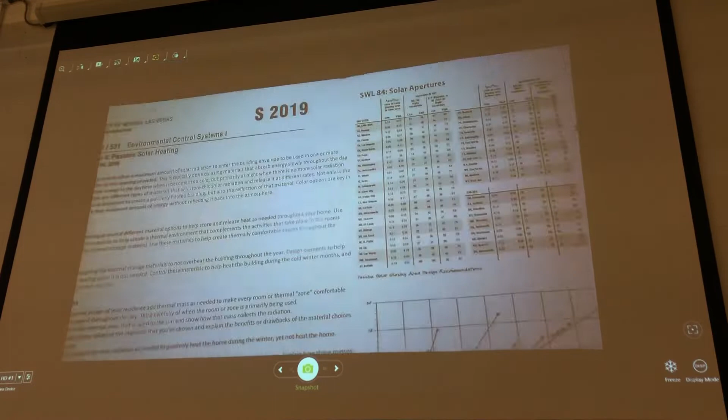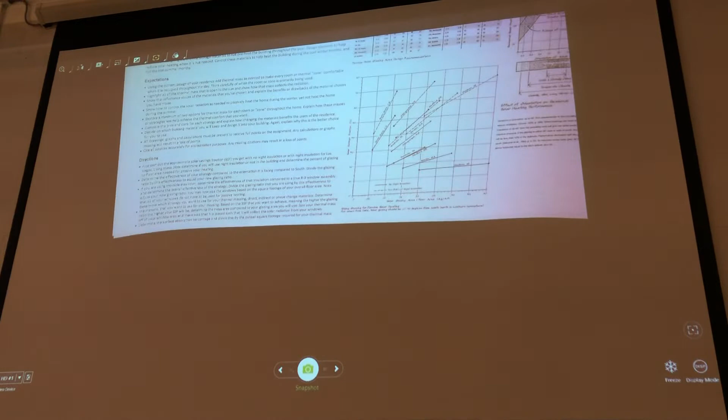So what is it that we're ultimately looking for with exercise 4? Well, essentially we want to make sure that we're able to heat the overall interior of our entire building as much as we can through passive solar heating.

So what we want you to do is use your current design of your residence and look at trying to create thermal zones. Thermal zones can be whatever it is that you want them to be. They could be individual rooms for all I care. Realistically, for things to work very well, ideally you want to try and group rooms together. So maybe you have one large open area for your living, kitchen, dining, whatever it is - you can make that one zone, and then make everything else a separate zone.

At the very least, you need to have a minimum of 2 zones. At a minimum, 2 zones.

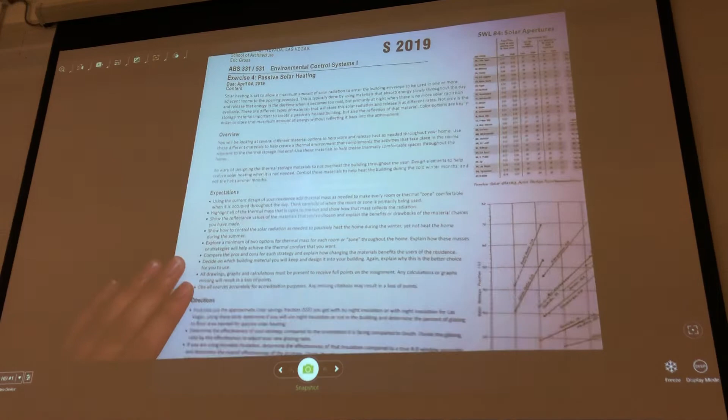And what we want you to do is pay attention to when that room or that zone is actually going to be used. So think carefully about when it's primarily being used and try to design your thermal systems based on when they're being used.

So think about it logically. Your bedrooms are probably going to be used more at night when people are sleeping, so maybe you want something that's going to last longer through the night to keep the space comfortable. Your living, kitchen, and dining area might be used mainly during the day, and maybe there's a specific spot that people are going to congregate towards as soon as the sun rises.

That's up for you guys to decide and for you guys to explain, okay? Questions on that?

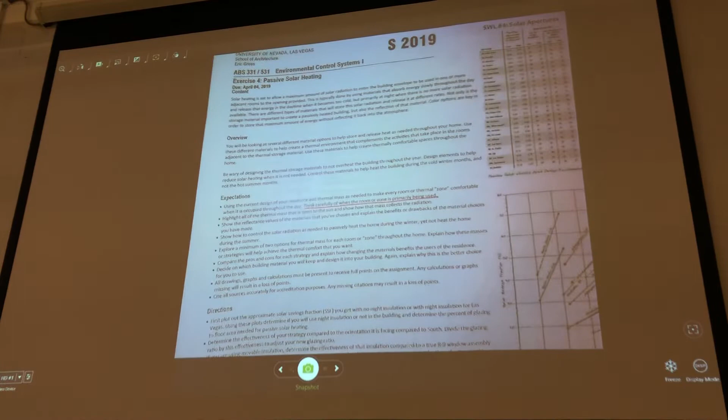All right, from there, we want you to highlight all of the thermal mass that you have that is open to your solar collectors. So wherever you design your thermal mass, make sure there are windows that allow for solar radiation to hit them, and we want you to show us that.

Where are you designing your thermal mass? Whatever system you want to design, just show it to us. And show us where your south-facing glass is going to be located.

Show us how you're going to control it. Just give us some simple diagrams. Are there any controls? Do you have it to where there is night insulation? Show us that. Do you have it to where it's going to be protected during the summer? Show us that, so that way no solar radiation actually hits it.

Yes? It could be just diagrams, absolutely. We just want to understand how it is that you're actually controlling it, okay?

We want you to explore at least 2 options per thermal zone. It can be the same 2 options for each zone, but try 2 options per thermal zone. So try a trombe wall and just a direct gain system. Try a direct gain system and a roof pond. Just try 2 different things, okay?

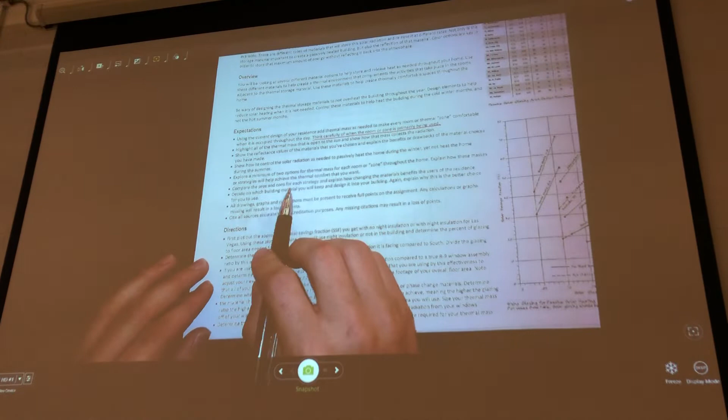So effectively compare the pros and cons for each of those systems. And then design the one you chose and put it in your building.

That's where you effectively highlight all of your thermal mass. Design something, put it in. Does that make sense?

And obviously make sure you have everything that's required as far as any graphs, everything - you know how it goes. Pretend I don't know a thing about what I'm talking about and that you guys need to explain it via everything on paper. Does that make sense?

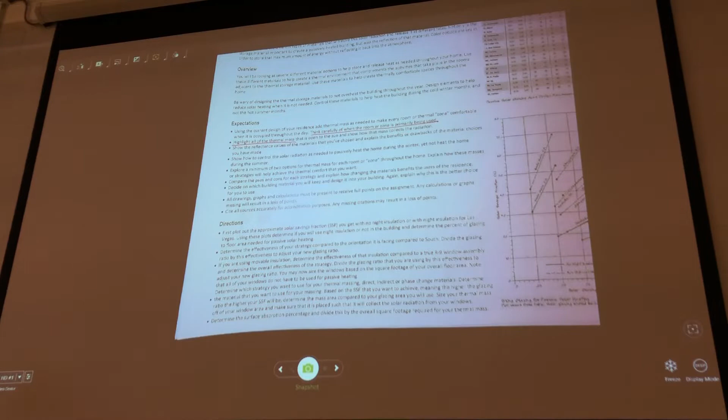All right. So how do we actually come up with our thermal massing systems? Well, the first thing we need to know is, what do we want our solar savings fraction to be?

How much energy do we want to save? And ultimately, is it actually effective for us to go with a higher percentage of windows to actually get us more savings?

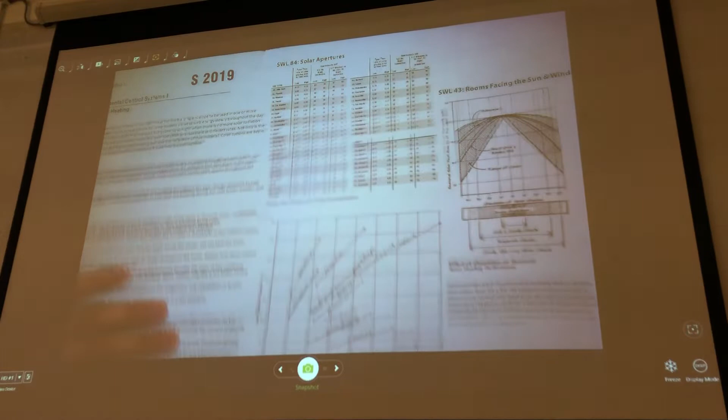Again, the example that I always go to is Madison, Wisconsin. We can effectively double our overall square footage of windows and only increase our solar savings fraction by 2%. Is that really worth it? Yeah, no - it's not even close.

So let's look at Las Vegas. We've got Las Vegas, Nevada, right here. We've got our overall percentage of windows, high and low. So let's draw those two lines - we've got 9% and 18%. So we come down to this graph and we're just going to draw a line straight up from 9% and from 18%.

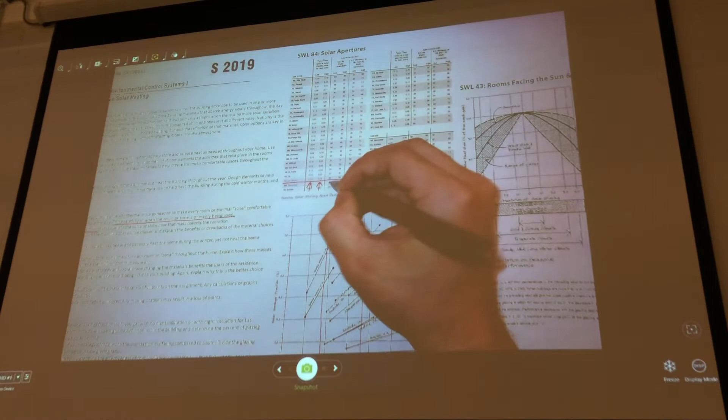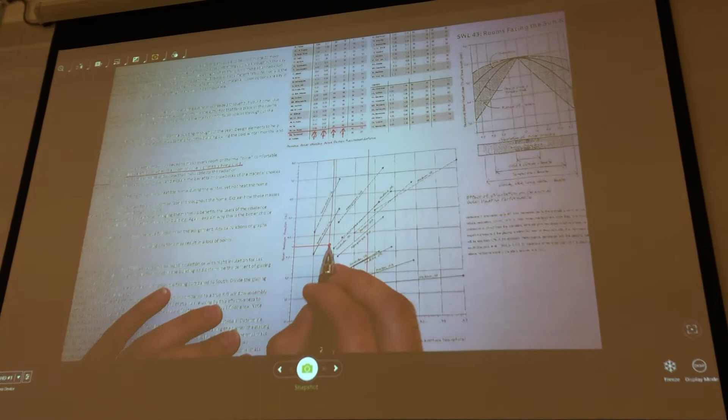Now, if we decided to go with no night insulation, we're effectively going to have a solar savings fraction between 35 and 56%. So we have 35% if we go with the lowest percentage of glazing, so only 9%, all the way up to 56% if we go with our high glazing.

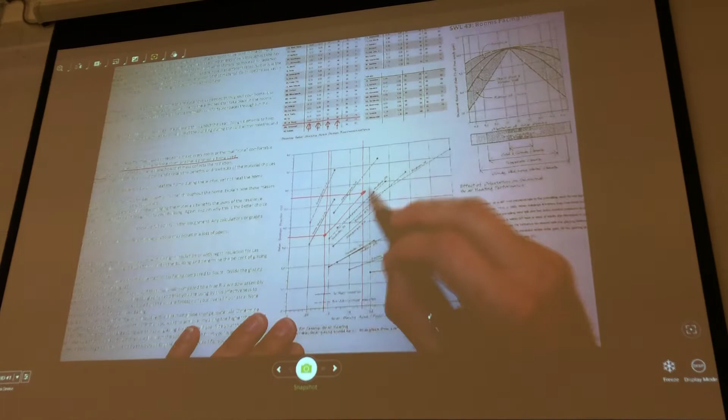So effectively, this is our line from Las Vegas with no night insulation. And you can see that if we double our overall glazing, we have a significant increase in savings. Is that enough to justify going with more glazing?

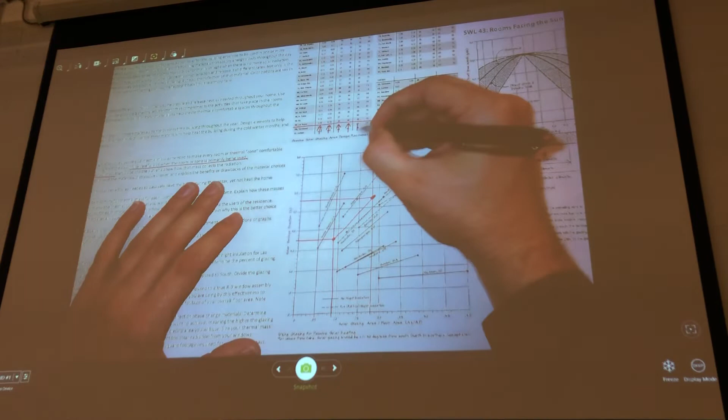I'll leave that up to you guys. Now, what happens if we go with night insulation? Let's see if there's any significant savings there. We're between 48 and 75%. So we go 48 for our lowest and 75% for our highest. And you can see that we can have even greater savings if we go with that night insulation.

Again, I'm going to allow you guys to decide what strategies to use. Now, if you wanted to, you could figure out, if I'm looking at my south facade, I can look at what I've already designed for all of my daylighting and anything that I adjusted for my overall building envelope, and just see how much glazing I have all facing south already and compare that to what my overall square footage is for my entire building.

So let's say that I've already designed, let's say 10% glazing on my south facade compared to my overall square footage. Well, if I wanted to keep that, not adjust anything at all, I can figure out exactly how much of a solar savings fraction I would have for Las Vegas by just figuring out where those intersects are.

So I don't even have to change anything if I don't want to. As long as I land somewhere within this percentage, 9% to 18%, I can figure out exactly what my solar savings fraction would be, ultimately. So may as well use what I've already designed, right? I don't have to change anything. It already works for everything else.

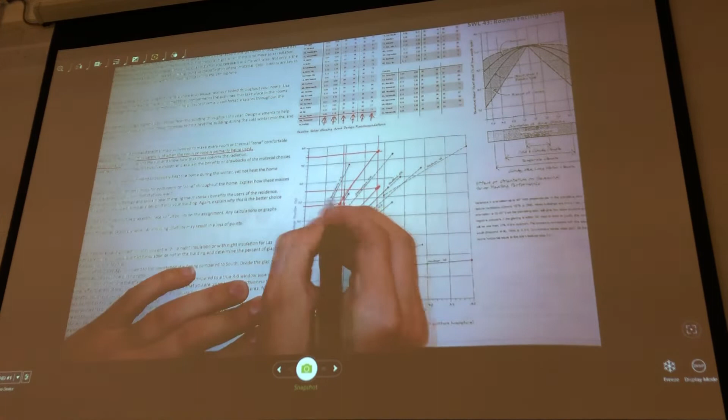All right, so let's say I got my 10%. Let's say I'm doing night insulation. Let's go ahead and move over and see exactly what my solar savings fraction is. I'm about 52%, which is a huge number. I can effectively save 52% worth of the energy that would be required to heat my building just by designing a passive system. That's a lot of energy.

Now, what if my building is not facing directly south? I need to make an adjustment. If you're not facing directly south, you have to adjust because of the overall efficiency of your system compared to a true south-facing system.

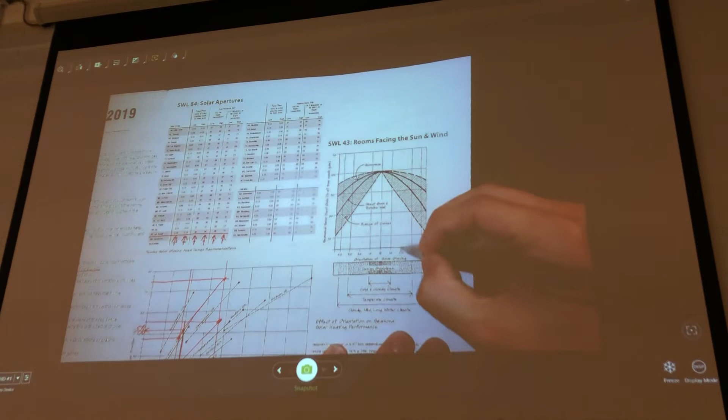So let's go ahead and assume that I'm not facing south just to show you what actually happens. Let's say I'm facing 20 degrees east of south, or west of south. West, east, it really doesn't matter because they're both exactly the same.

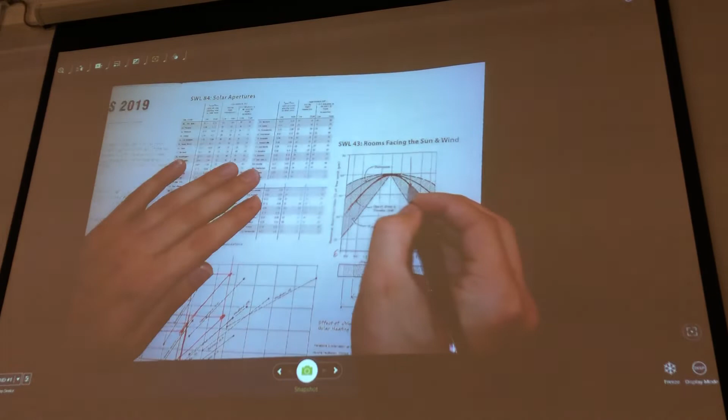And let's say that I'm going to design a direct gain system, the simplest system to use. So I'm designing a direct gain system, which is the second to bottom line. Where these intersect, if I move all the way over to the left, that tells me what the effectiveness is. I'm at about 95% effective.

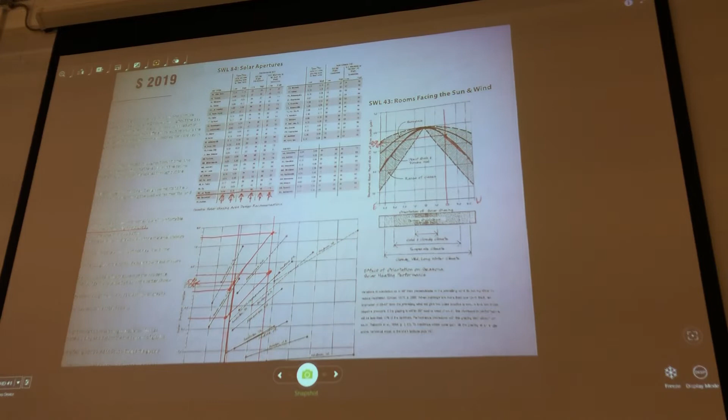So that means realistically, if I were to design everything with only a 52% solar savings fraction, I may only achieve about a 50% solar savings fraction. So for the purposes of trying to ensure that I get 52%, I actually need to oversize my system a little bit because I'm not facing directly south.

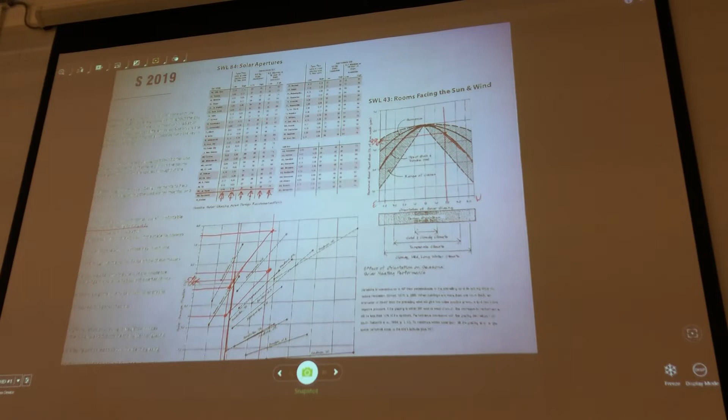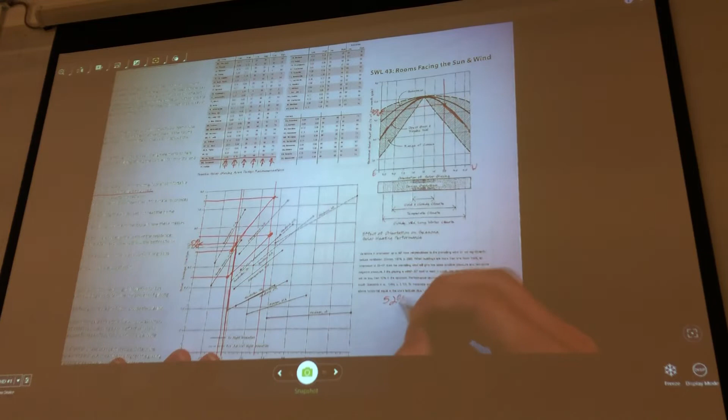So for the rest of the exercise, I'm going to assume that I have a higher solar savings fraction, so that it helps increase my overall windows and my overall thermal mass. So I'm going to take my 52% and divide by my overall effectiveness, so 95%. And what does that give me?

Any guess? Anybody do it? 0.52 divided by 0.95. So 0.55, or 55%.

So that will allow me to slightly oversize my south-facing glass, and it will allow me to slightly oversize my overall thermal mass. So in order to figure out exactly how much glass I should actually have to achieve 52%, I would come back here at 55%, go to where my intersection is, and come straight down, and say, okay, instead of 10%, maybe I need 11% in order to effectively get 52%.

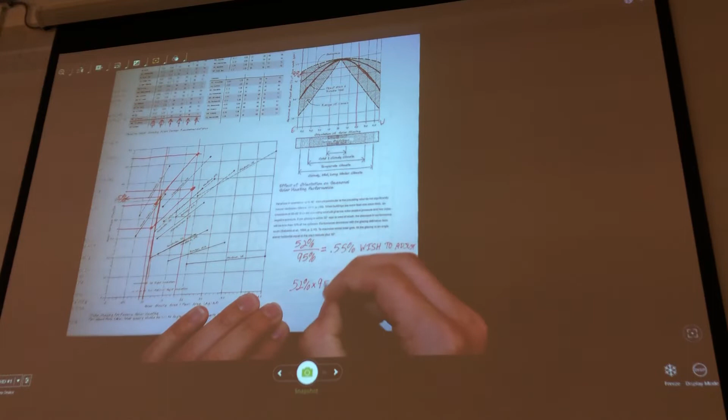Otherwise, if I stay at 10%, my solar savings fraction will not actually be 52%. If you do not wish to adjust your overall square footages at all, you can take your 52% and multiply it by your effectiveness to find out what your new solar savings fraction actually is. So this is if you wish to adjust, and multiplying them together is if you wish to not adjust. This will give you your new solar savings fraction. So 52% times 95%.

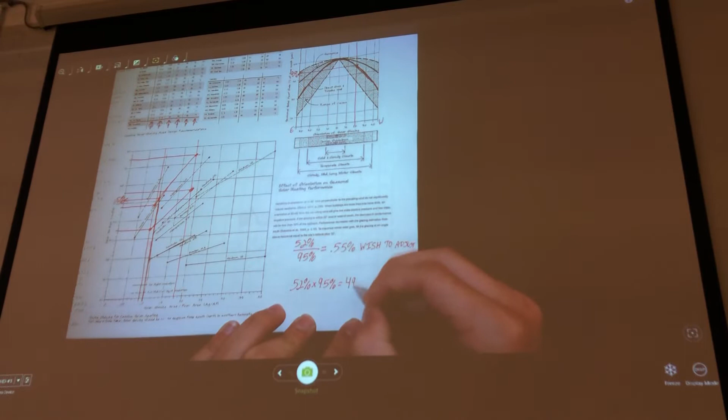What does that give you? 49%? So this is if you do not wish to adjust. Does that make sense? Questions?

All right. Now I need to figure out, okay, if I'm doing night insulation, I need to know how effective my night insulation is compared to a full R9 only open 8 hours. So if you do an R9 open 8 hours, you're pretty much good. But let's say you want to do something a little bit different.

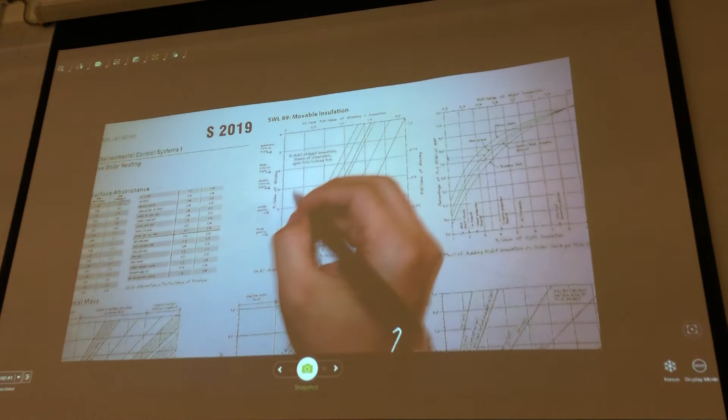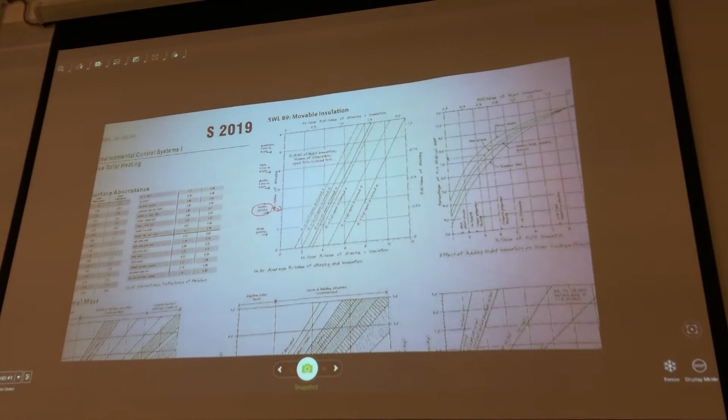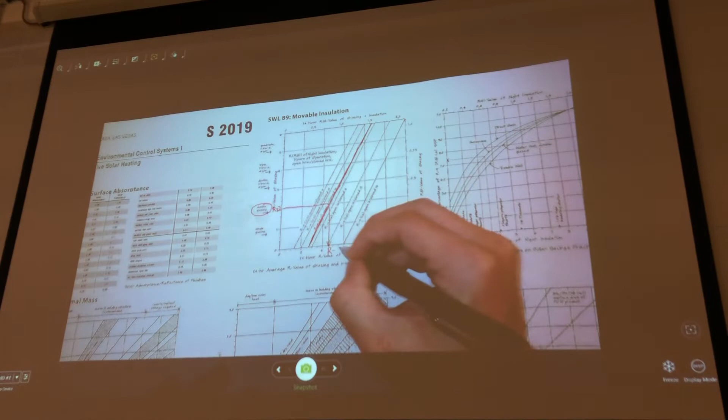Let's say I only want to use a full double glazing, which means I'm going to start with an R2. I'm not doing low E, maybe I'm cheap, I don't know. And let's say instead of an R9, I go with an R4 because again, I'm ridiculously cheap, and it's only open 8 hours of the day. That means effectively, my R value is an R5.

And with this number, I can move over to my night insulation at an R5. So we got R5, I go with my direct gain system here, and where these intersect, again, will tell me my overall effectiveness. So I'm at probably, what, about 88%?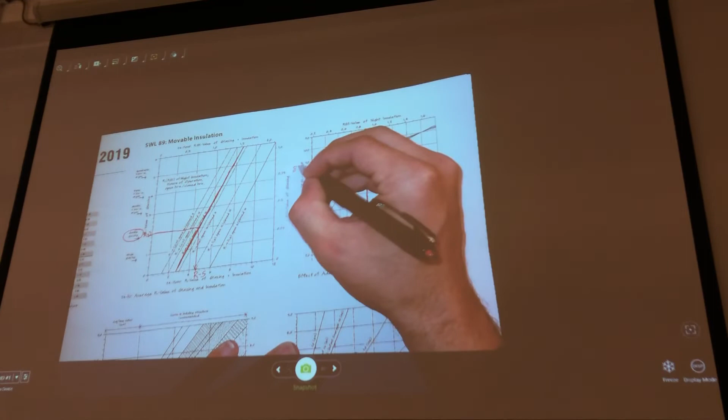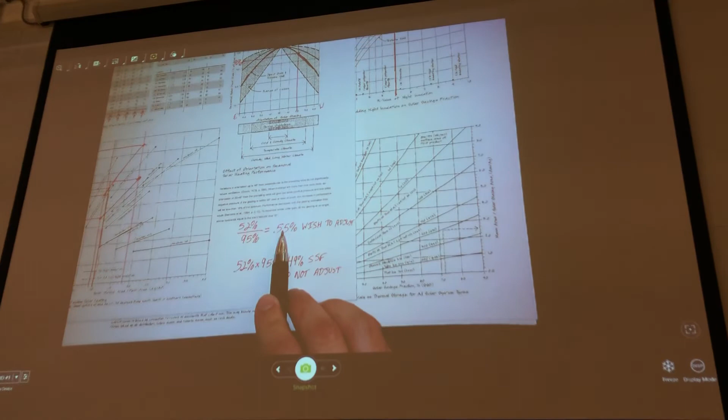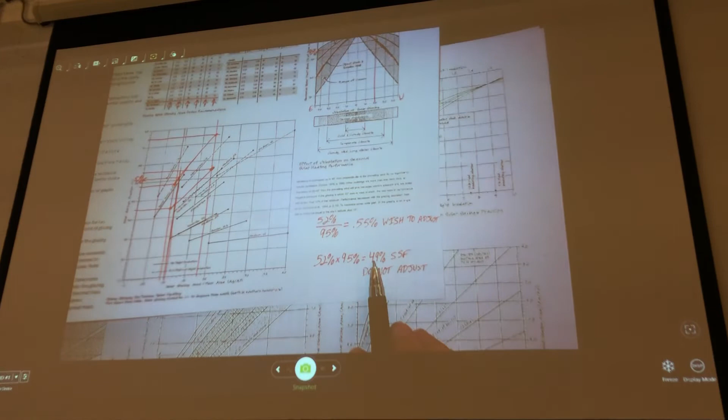Again, if you wish to adjust your overall square footages for your thermal mass, as well as your windows, you will take your overall effectiveness that you created with your adjustment to face south and divide by your overall effectiveness for your night insulation. If you do not wish to adjust, you will take your overall effectiveness compared to south and multiply it by your effectiveness for your night insulation.

Does that make sense? So if I wish to adjust, I take my 55%, I divide by 88%. So this is if I wish to adjust. If I do not adjust, you take your 49% and multiply it by 88%.

So what do we get if I wish to adjust? All right, 63%. And if I don't wish to adjust, 43%.

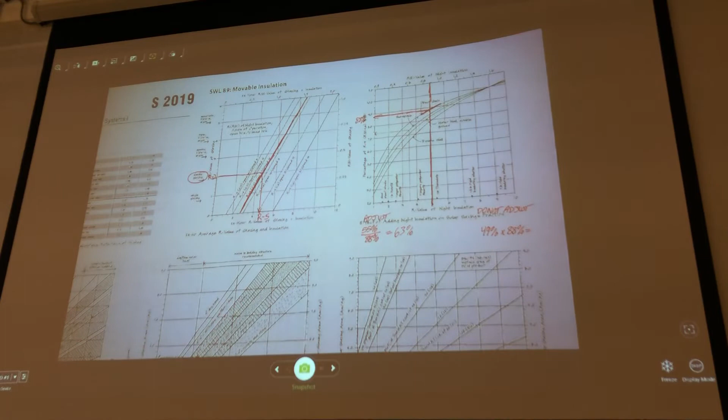So if I don't adjust my overall square footage for thermal mass and my glazing, then effectively my solar savings fraction, instead of being 52%, I'm now down to 43%. That's a big chunk that's now no longer going to be used.

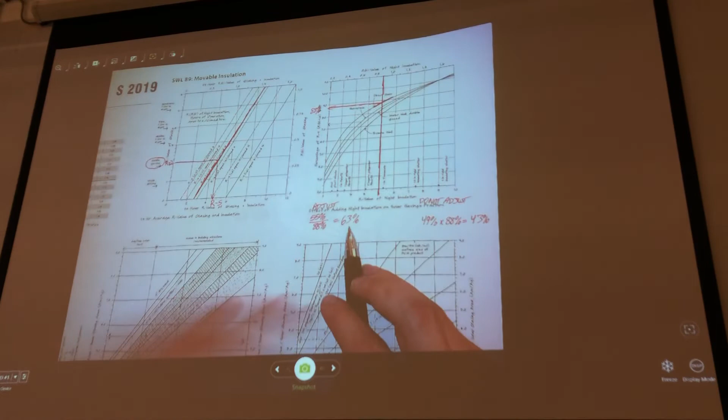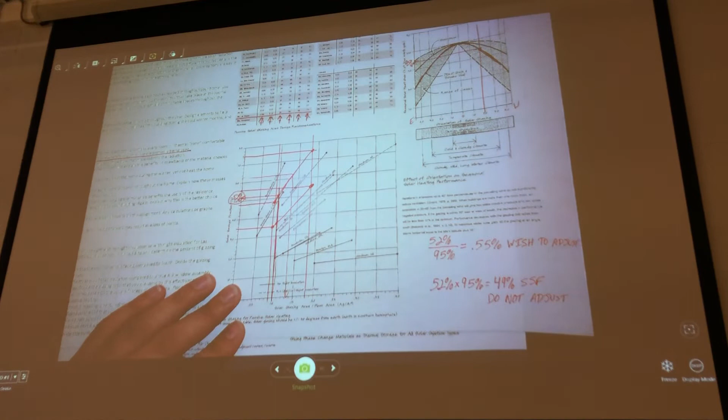But if I do adjust my overall square footage for my glass, utilizing 63%, so if I came back here and used 63%, went over to my night insulation and came down, that'll tell me what my new glazing ratio should be. So realistically, if I wanted to ultimately achieve 52% solar savings fraction, at the very end, I need to be somewhere around 0.135, so about 13.5% for my glazing.

And I would use the 63% to figure out my overall thermal mass. Otherwise, I'm going to stay with 52% throughout the entire exercise and know that at the very end, I'm actually only going to have 43%. Does that make sense? Okay.

So again, if I wanted to figure out what my thermal mass is after adjustment, I'm going to go to 63% and create a line. Otherwise, I'm going to stick with 52% and create a line. So this is with my adjustment. This is without.

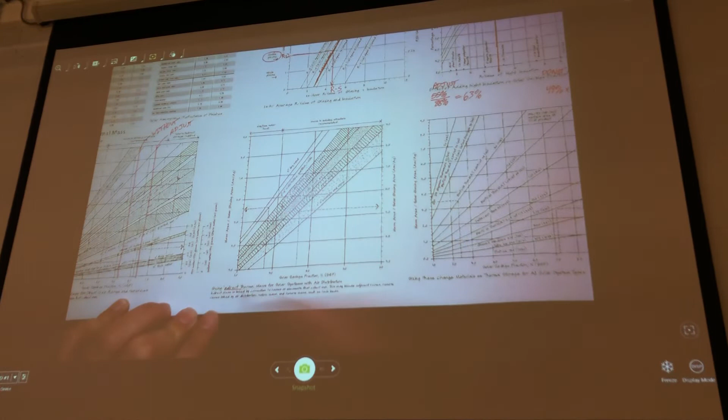And this is if I want to do a full direct gain system. Pay attention whether you're doing direct, indirect, or you're doing some form of phase change. So pay attention to that. Again, imagine that budget doesn't matter unless you want it to matter, okay? I'm not going to be critical about budget. So if you want to use a phase change material and spend a lot of money, I don't care. Just try something.

Okay, so let's say I want to use 4-inch concrete. I'm going to find where it says 4 to 6-inch concrete here. And remember, I have a range here, an overall range for my concrete. If I go with the thinnest concrete, I need more square footage of that overall thermal mass, so I'm going to go with the high line. If I go with the thicker material, I need less square footage, so I'll go with the lower line. I'm going 4-inch, which is the smallest out of this range, so I'm going to select that highest line.

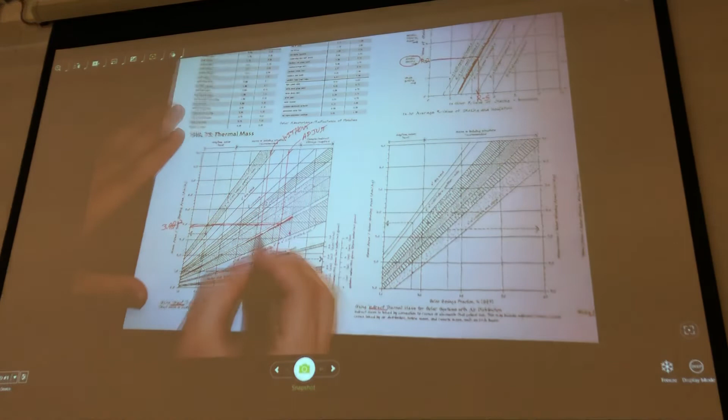If I were to adjust to ultimately get a 52% solar savings fraction, I'm somewhere around 3.9 square feet for every 1 square foot of south-facing glass for 4-inch concrete. If I didn't adjust and stayed at a 43% solar savings fraction, I actually only need about 3.2 square feet of concrete for every 1 square foot of glass.

So you're going to take this and multiply it by your glazing area. Does that make sense?

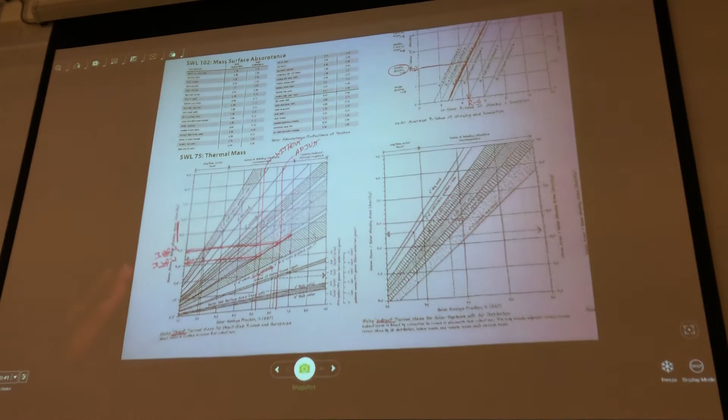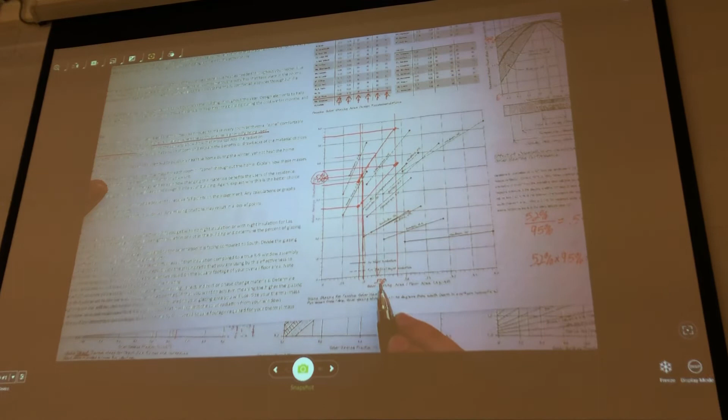Let's take an assumption and say my overall thermal zone was 1,500 square feet. I'm going to be lazy and only design one for my actual house. I know I'm supposed to do 2, but I'm lazy, and that's just the way I roll. So 1,500 square feet, I multiply it by my overall percentage of glass, either 0.1 if I went with a 43% solar savings fraction, or 0.135 if I wanted 52%.

Let's see what happens for both, just to see what ultimately comes about. In this case, I've got 150 square feet of glass. And if I took the other one, 1,500 times 0.135, I end up with 202.5 square feet of glass. So an extra 50 square feet of glass if I wanted that 52% solar savings fraction.

Again, it's up to you guys to decide or argue either way. Then we would take this and multiply it by our overall ratios here. So if I didn't wish to adjust, I multiply this top one by 3.2. If I did adjust, I multiply by 3.9.

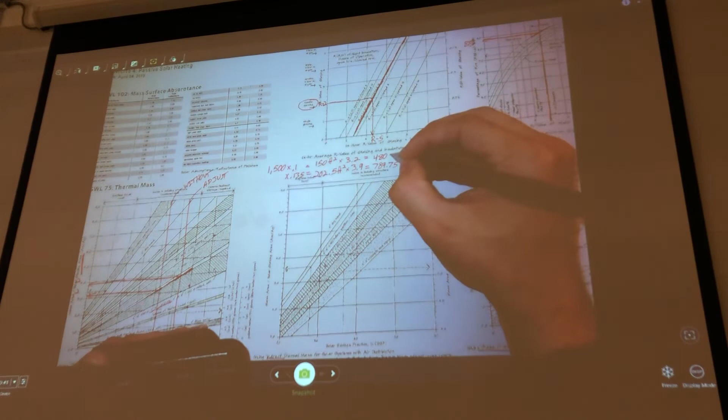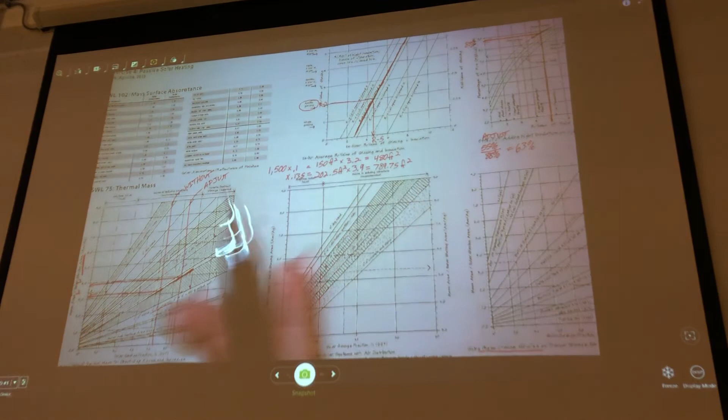So without adjusting, I only need 480 square feet of concrete. At 43% solar savings fraction, that's all I need. But if I want to go with the extra additional solar savings fraction, I'm going to need an additional 309, almost 310 square feet, almost effectively doubling it, all to achieve an additional 9% solar savings fraction. Is that worth it? I don't know. That's up for you guys to decide.

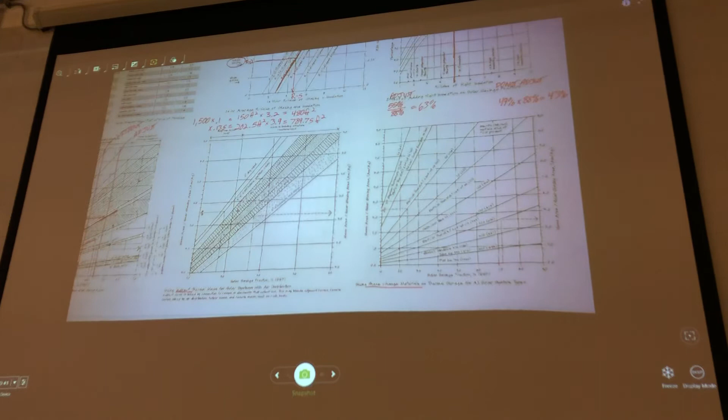Again, it's the exact same steps whether you go with an indirect system or a phase change material, it's exactly the same. If you want to use a roof pond, there are additional tables you can actually use for a roof pond. If you wanted to use earth-air heat exchange, you can use that. This right here is just the base system that we've actually supplied.

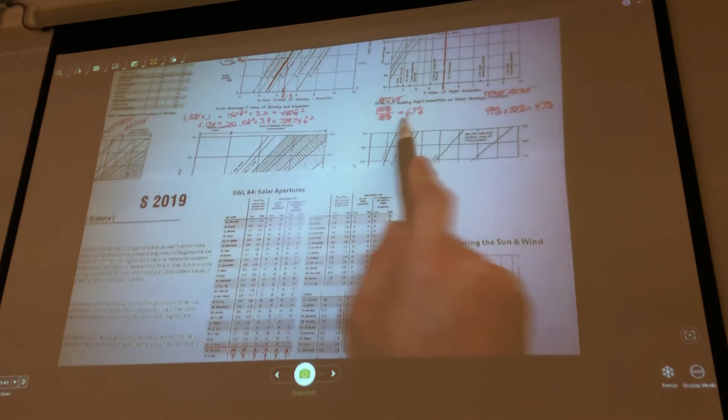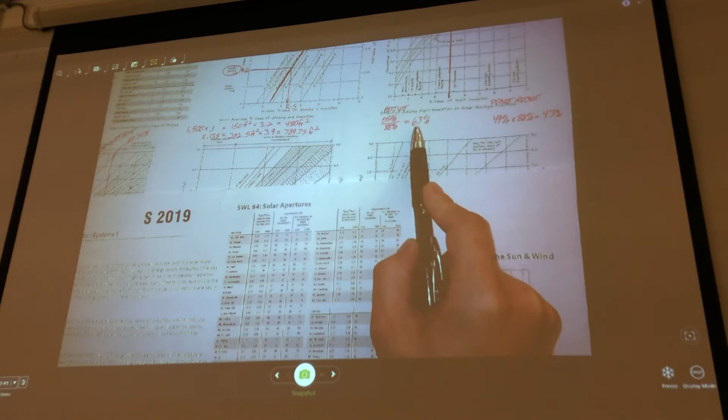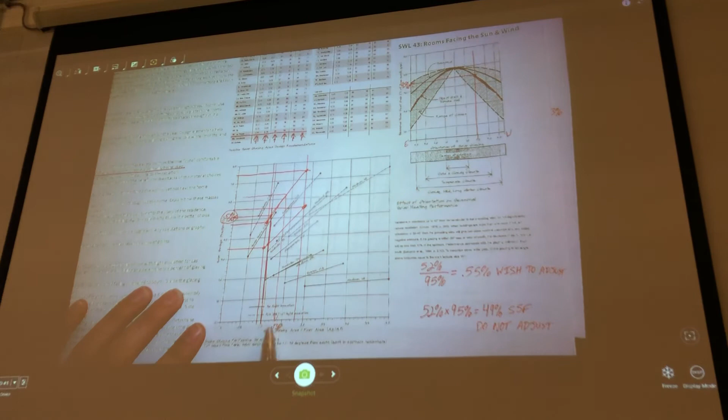Where did that 0.135 factor come from? If we wanted to ultimately achieve the higher solar savings fraction, we actually needed to come back here and adjust. If we adjusted overall with the tilt that my building is at, plus the overall ineffectiveness of my night insulation, my solar savings fraction is now all the way up to 0.63, just to achieve, ultimately at the very end, 0.52. So I come back here to my overall window ratio, come up to a 0.63 where I have my night insulation, come back down, and that tells me what my window should be. Does that make sense? Yeah.

So this whole process was just for one zone, right? That would be for one zone, for one strategy. Okay.

But again, we just went through this in 15 minutes. Once you do it once, it's going to be a lot easier to do it again. And again, ultimately, I don't care if you guys fail. I don't care if this doesn't actually work at all. I just want you to attempt something. Try it, see what happens. Be bold, be creative. Do something that's different, something you've never done before. Because I'm certain that none of you guys have actually done this before, right?

So try it. Are there any questions? Nothing? Yes? So after we test the strategies, do we need to update those into our design?

Yes. So for each thermal zone, you'll try two different things, going through the calculations for two different systems. And then look at those systems and see, okay, what were the pros and cons for each of these? And which one do I ultimately want to choose? Which of those two strategies do I think works effectively? And once you select that, put it into your design and show me where it is. See what works.

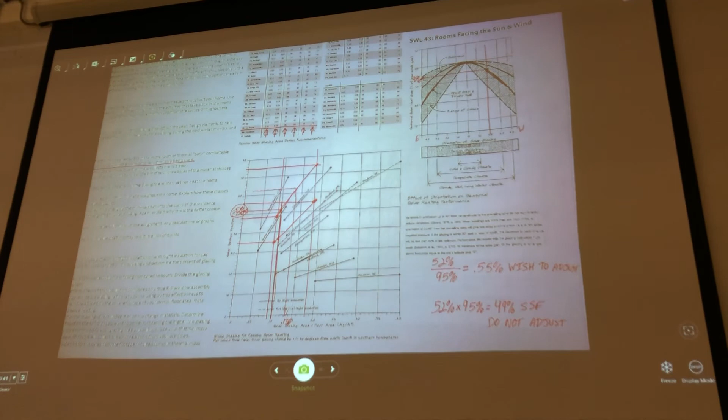For those of you that actually turned in a redo of exercise